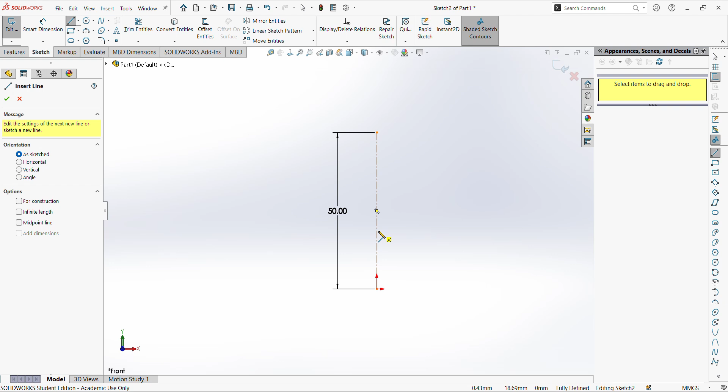So looking at that, let's draw the basics of what our shape looks like, right? So we'll come out a little bit, come on down a little bit. We know it lines up with that bottom plane, so we'll come out a little bit, come up a little bit, and then if I remember right, it had a little dip, it had a little valley in the center, so we're going to make that.

And with a part like this, you don't need to completely fill it in because we're going to do that right now. What you could do before you mirror it, and I think it still works after you mirror it, but we'll mess with it now. That way we know we're doing it the exact way. Put your dimensions in now, because we're going to mirror this across that center line.

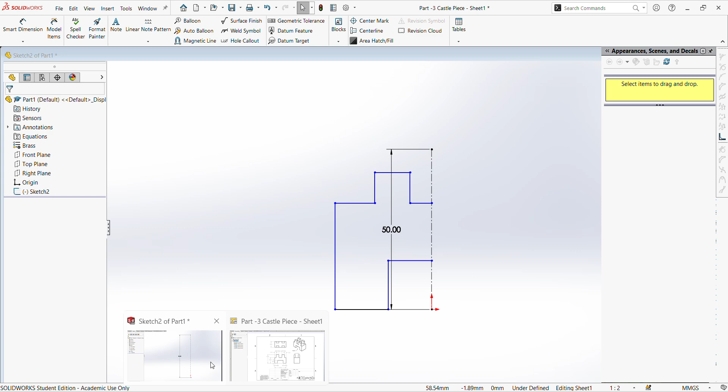So we got 100 wide, 25, so we know 25 and 50 is going to be that. We can assume that from the middle point. We know it's 75 tall, and we got a little 12.5 and a 25 here. So let's put those in. If you guys can remember all that with me, I think I got it.

Oh, that's weird. Huh, look at that. I think this was 25 as well. You know, but I remember the whole part being 75. So let's actually get rid of this. Let's make the whole thing 75. Let's see what that does there. It still wants this distance.

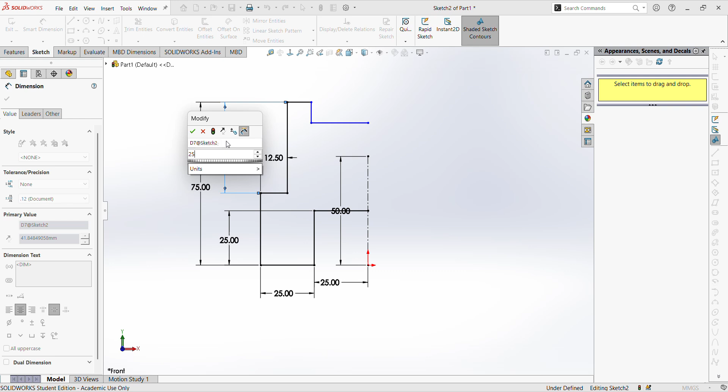So you know what? I think this was most likely 25. Let's fiddle around. Let's see what things look like. And we can go back to it in a second. The image is right over there. But on your exam, you want it to look, you know, close. So try to remember those distances and see what you get here.

Okay, let's see what we got here. Let's go back over. We got a lot of it defined, but we might be wrong on some of it. 25 over, 25 over. We said 75 tall. That's right. It's 50 here. That's the mistake we made. 50 here. And so another 25. 12.5, 25. And if we're assuming 100, 12.5, 25, 12.5 is 50, right? So this distance has got to be 12.5 as well.

And you can make some assumptions like that with chain dimensioning as long as you know the overall dimension. So don't hesitate to do that kind of stuff. And you can see it actually already made that dimension because we had the 50 here in most of it here, so it knows how long this is. It just wants to know how tall this is.

We said this was 25, which I believe we had right. Yeah, 25, 50, 75. So each step is just another step of the way. So this would technically, no, this is correct. This is correct. It's just this height it needs. Cool. We had it mostly right, guys. We had it mostly right.

Oh, this is collinear with this. It might not say it, but you can kind of make that assumption here. It probably should have another one here, or maybe they should say times 3. Some different ways to look at it, but we know it's collinear, so we're going to do that here.

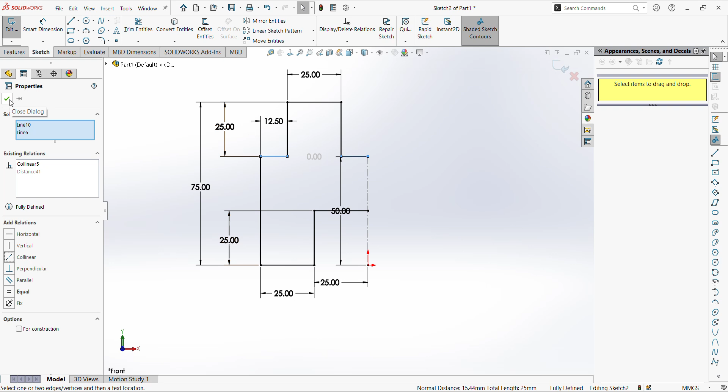Cool. Let's grab all of this, and let's mirror entities. New tool for the tool belt. And look, it automatically mirrored over that center line. How cool is that? And the sketch is fully defined because it closed it, didn't it? And because it mirrored all these dimensions to this line, to the origin, we're in game. Look at that. Let's extrude that now.

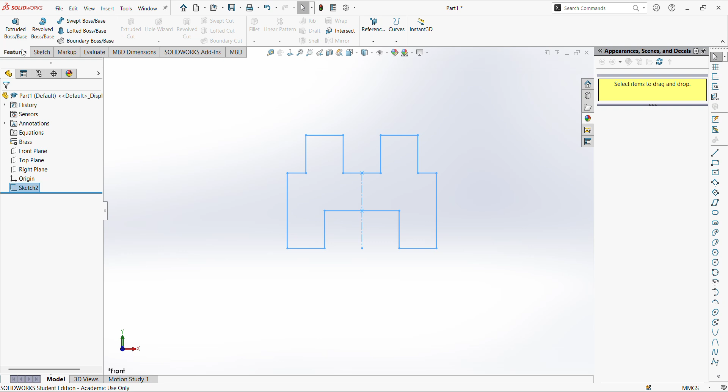And I believe we said the origin was at the center point. And so we're going to extrude it. I think it was 50. Let's give that a try and confirm that it's correct. I already put my part in brass, so you can see the color kind of changed. You might not have noticed that before.

50. Cool. But now we see there's a little opening here, isn't it? One of the best tools I can put in your belt is your mind's eye and also your eye's eye. Always double check your eyes. Put it in ISO. Look at what it looks like, especially in the exam.

If you're in the exam and something isn't lining up, check the front view. Go to the front view. Make sure your image matches theirs exactly. Don't make up dimensions like I mentioned in a previous video. I did mention you could make assumptions. Some assumptions that are logical, like this is all linear. If they didn't put anything else in there, that makes sense.

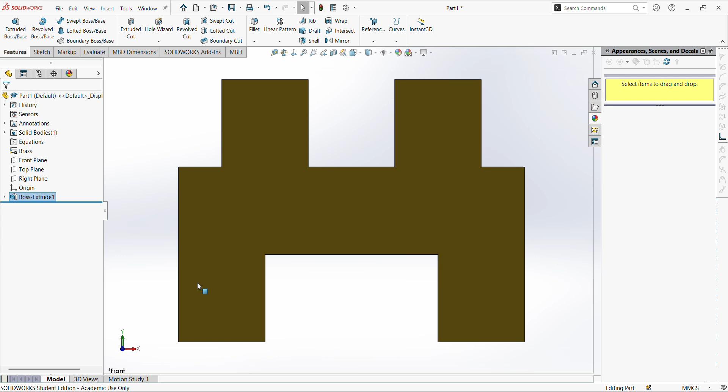So one of the ways you can tell is you make the whole part, and if you make an assumption on a part, make a mental note of it, because like I said, it's going to give you a choice of 4 options of mass. So if you make a right assumption and you get to the end and you notice that your property matches one of the options down to the double decimal, you probably have it right. You probably made the right assumption.

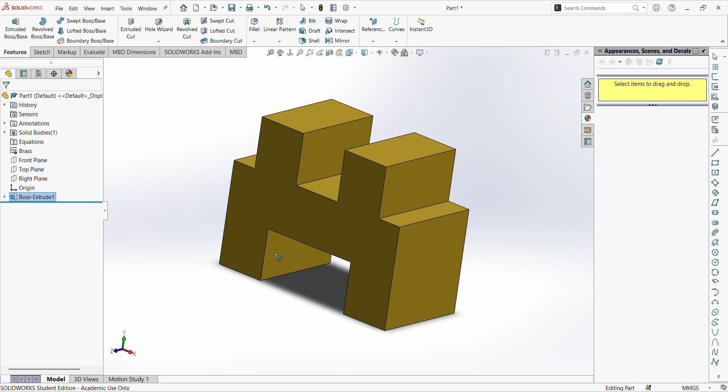Now, if it doesn't match any of the 4 answers, go back to that mental note you made and double check that assumption and make sure you made the right assumption. And if it's not, maybe that's where you're wrong.

So let's move forward. We know we have a cut rectangle out of this area. Since all the dimensions of this designer have been similar before, we can make some assumptions. Like this is probably going to be 25, right? And this edge, because it's 50, is probably going to be 12.5. So those are assumptions you can make as you've worked through a design, because you kind of think of it like a painter in their strokes. You know what someone's doing by what they've done.

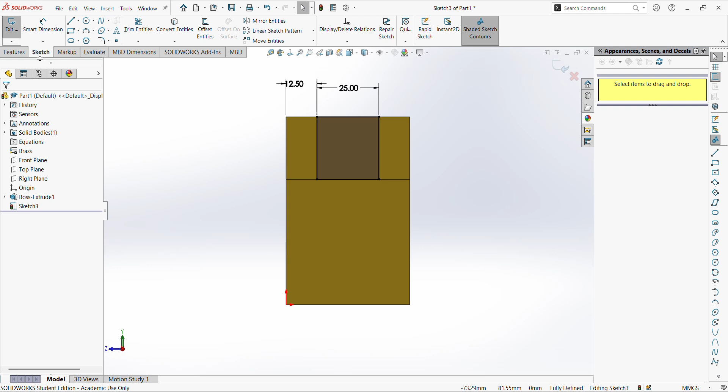You can see how I've done it. It's all kind of in multiples of 5: 10, 100, 70, 50. So if we cut this out right and we look at it, we kind of know it looks right. If it was a weird angle and this was a little bit longer than this one proportionally, we would know that it wasn't that same style we've been following, and you would look for those numbers. But on the fly in an exam, make the numbers quick, then go double check, and you'll often find you're right if you have a good eye for this, especially if you've been working on things.

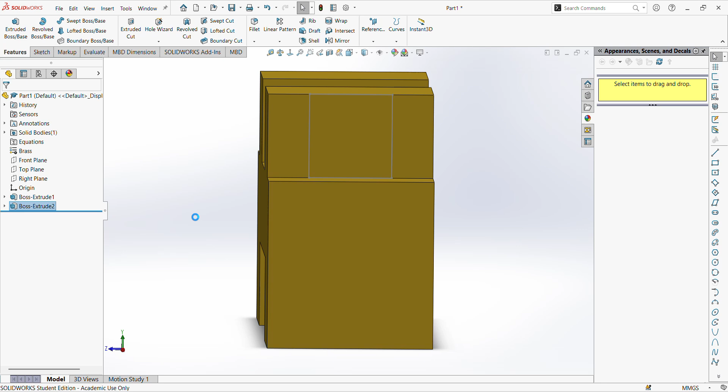So in a lot of cases, you could make things faster by going up to surface and clicking. But like we saw in the last video, that can cause errors, so sometimes it is good to... Oh, and I clicked the wrong button. I extruded, didn't I? I wanted extrude cut. So let's back that up, hit the right feature button, and we'll do up to surface, and we'll cut it. Cool. Double check that ISO.

We're not going to show you the weight and properties, because we're going to use that as a way to test you guys. It will be in the comment area and in the description of the video at the bottom. Build the part first off the drawing, see if you can do it. Then watch the video if you couldn't, and then double check the mass properties. And if you still messed up somewhere in there, double check it all.